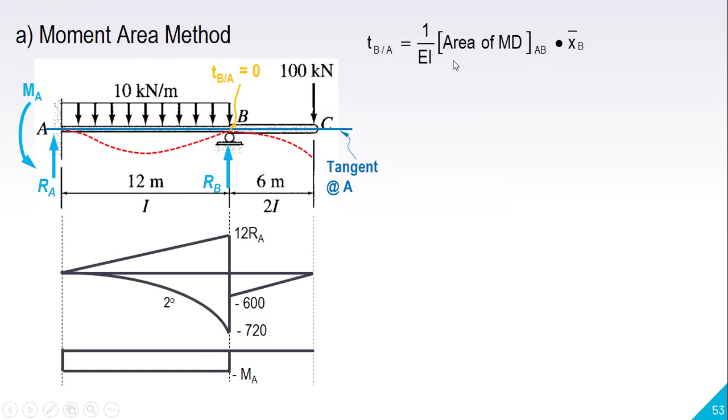So we consider the area of the moment diagram between A and B, so this one is not included. We only have 3 diagrams. Then the distance, moment of area about B, using the centroids of the triangle, spandrel, and rectangle. The distance from the centroid to B is 1/3 of the base for the triangle, 1/4 for the spandrel, and 1/2 for the rectangle. Since we are only considering area from A to B, the I is the same, so we can group the three diagrams. It's different for BC since that's 2I, so we separate the moment of area there.

So triangle, 1/2 base times height, distance 1/3 of 12 is 4. Spandrel, 1/3 base times height, distance 1/4 of 12 is 3. Rectangle, area 12 times MA, distance 6. Equal to 0, so cross multiplying gives 0. So 1/2 of 12 times 12 times 4 equals 288, 12 times 6 is 72 MA, and 1/3 times 12 times 720 times 3 is 8,640. We can reduce this equation by dividing by 72: 4RA minus MA equals 120. This is our equation 3.

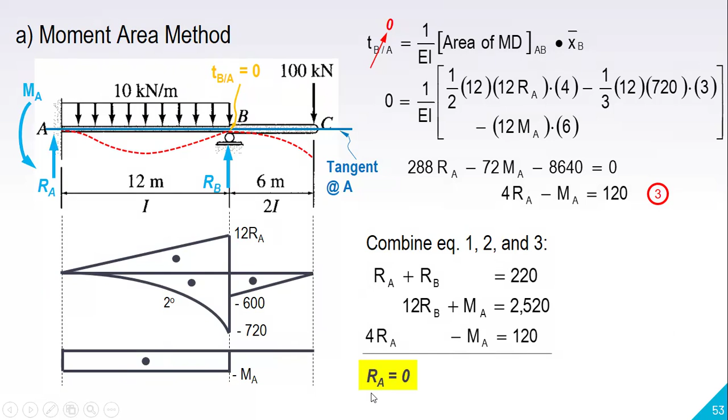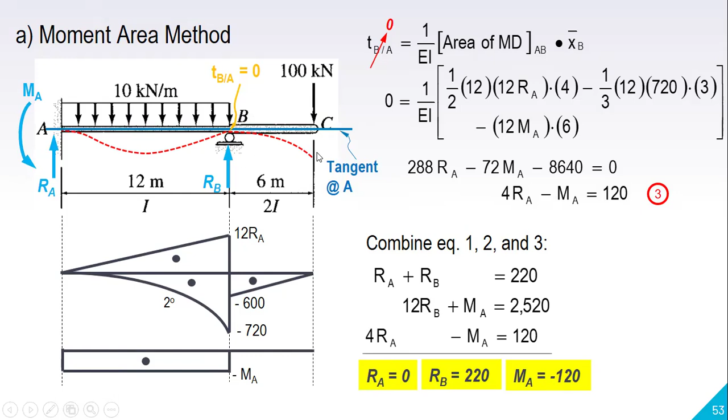Combining equations 1, 2, and 3, using your calculator, mode 5, 3 equations, 3 unknowns, we have RA equal to 0, RB equal to 220, and MA is negative 120. Meaning the moment at A is clockwise, since the assumed direction is counterclockwise but the value is negative. These are the reactions, and next is to determine the deflection at C. Reaction at A is 0, at B is 220, and the moment at A is clockwise 120.

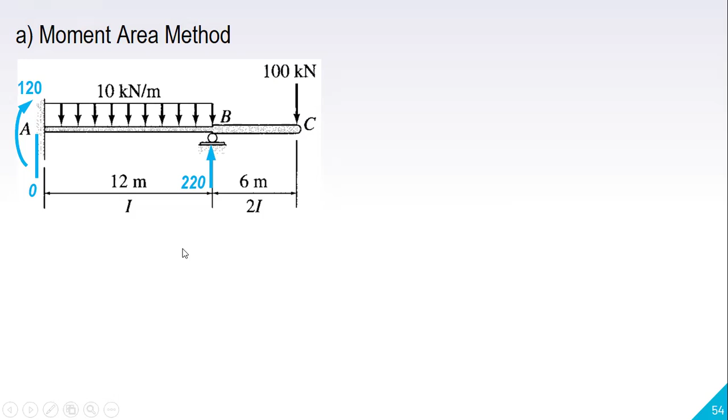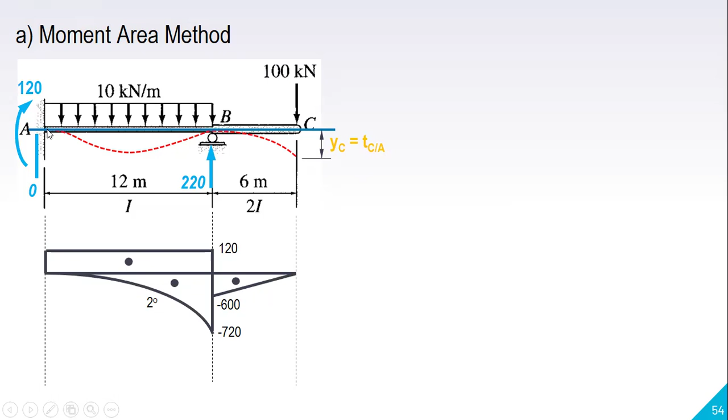Doing the diagrams, the triangle is gone since RA is 0. The moment at A is now positive, positive 120. For the uniformly distributed load, same, negative 720, and then 100 times 6. Drawing again the elastic curve and the tangent at A, this is our deflection at C, which is at the same time the deviation of C with respect to the tangent line at A. From theorem 2, the deviation of C from the tangent at A equals 1 over EI times the moment of area between A and C about C.

This time, we include B to C, which is 2I. So we separate AB, which is I, and BC, which is 2I. So 1 over EI, rectangle 12 times 120 times 12 minus 1/3 of 12 times 720 times 9, and then minus 1 over E times 2I, area 1/2 base times height, times 2/3 of 6, which is 4. Cancel and simplify, and the result is negative 12,240.

So YC, or the deviation of C from A, is negative. Negative means the tangent line is above the elastic curve. From the figure, it means point C is below the horizontal, so the deflection is downward. So this is the answer for the first method, the moment area method.

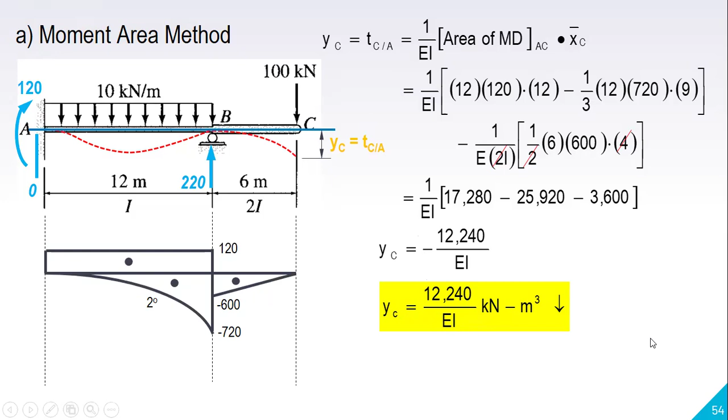Part B will be about the three moment equation.